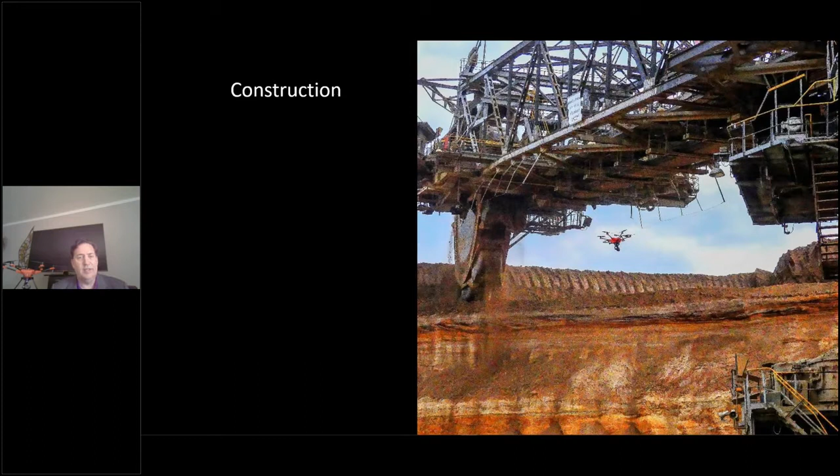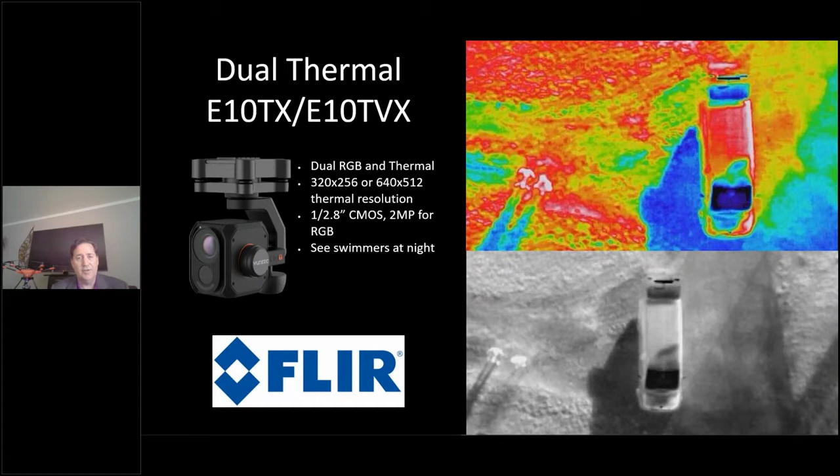No problem. So I'll quickly review the PhotoMesh UAV package that we have bundled with Yuneec and are offering specifically for the UAV market, and then we can go over the actual demonstration of the products from PhotoMesh and the Skyline TerraExplorer. So the basic features and capabilities that we focus on: extremely high accuracy and quality, optimized for creating sharp corners, sharp edges, really best use of the texture.

We produce all of the basic 3D mesh formats, including Skyline's 3DML. You could also produce a point cloud, an LAS format, or true ortho, and elevation layers. And we combine nadir, oblique, terrestrial images, all in a highly automated fashion. And you can also incorporate control points. You can work in any coordinate system, vertical datum, projection that is required by your customers.

The visualization side you could use for displaying different layers such as GIS on top of the 3D model, simulating movement, particle engines to simulate fog or smoke, as well as objects moving, and do any sort of measurement analytics in 3D. So that's really the full range of quality that we're working with.

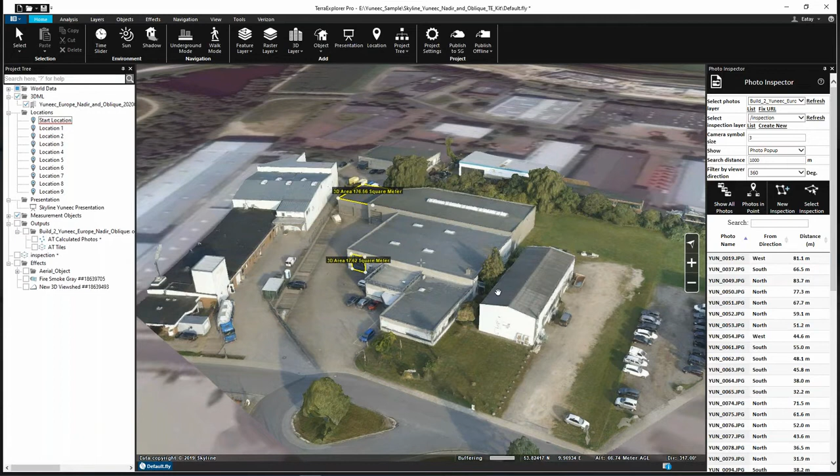To give you the quick demo, this is a sample from the H520 Yuneec drone. And this is the final output being displayed inside TerraExplorer. So the PhotoMesh UAV package includes the processing software, which is PhotoMesh, as well as the visualization and analytics suite, which is TerraExplorer. You could see the general quality, and I'll jump back a little bit and we can go over how this was made, the process for creating this data.

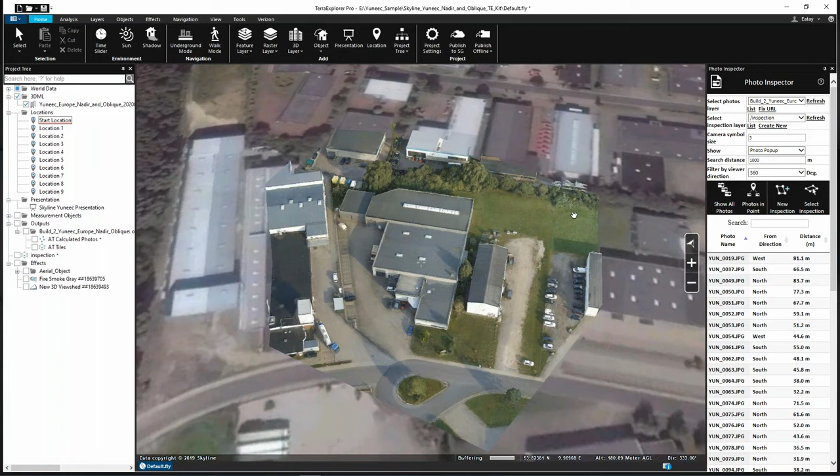And then we'll jump back in and show the full tool set and capabilities, features that are available in the full suite. So to cover the PhotoMesh side, this project is, in this case, nadir only. I have two projects to demonstrate. One of them is a nadir only project. The other one is a combination of nadir and oblique, to see how the software deals with both of these. This is courtesy of Universal Aerial Ventures, a Yuneec customer and user and flyer out of Oklahoma.

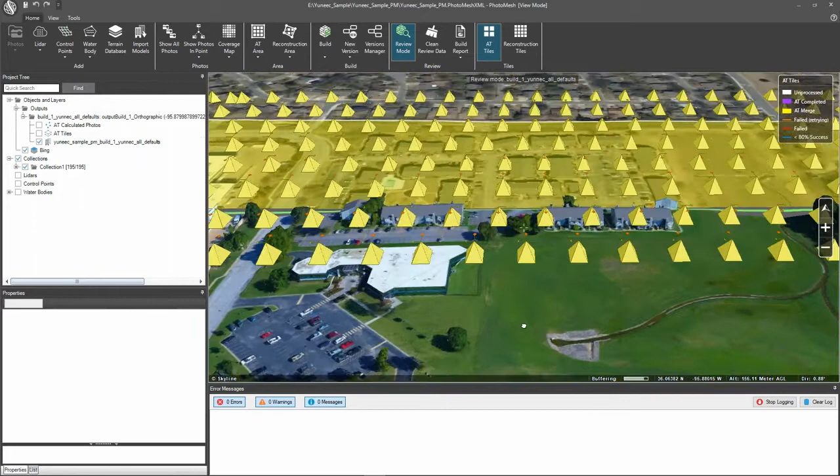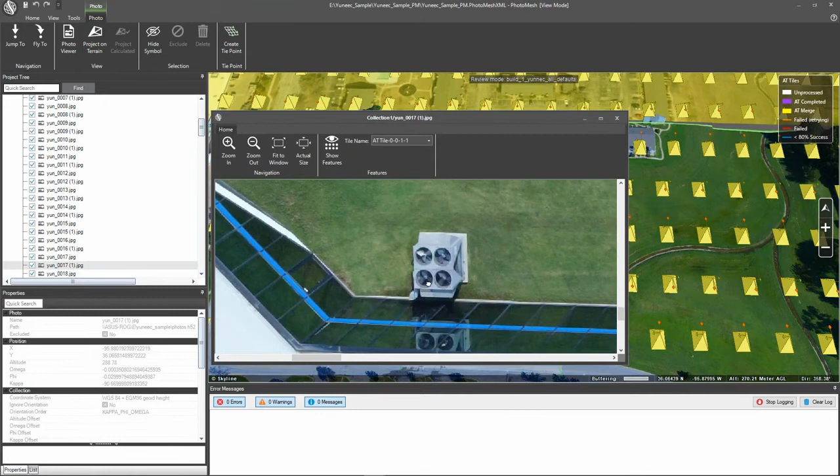So you can see this is the display of the images and how they were collected. This is a single image. And even though the images are nadir only, you could see on the side of the image, given the field of view and the lens opening, you could clearly see the sides, and you have very good parallax for doing depth measurement and creating the model.

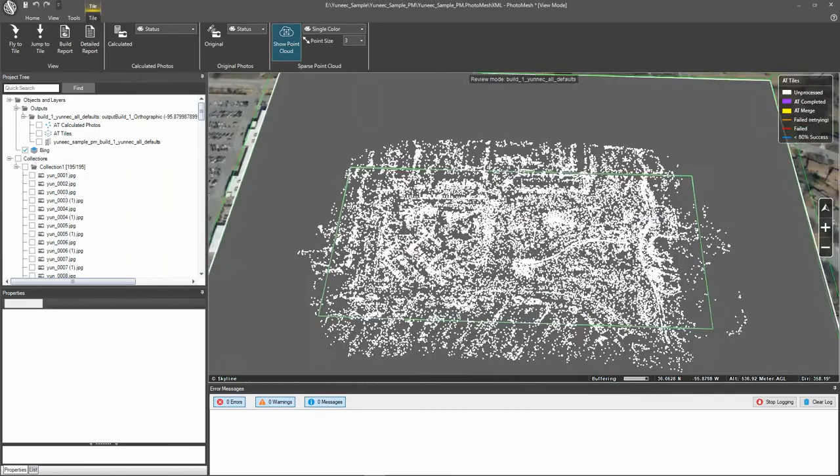So out of good overlap nadir data, we take the entire data set. We produce an aerial triangulation of the data set. And as part of it, we calibrate the sensor and the lens. So the principal point, all the radial distortions, we adjust the focal length, whatever is necessary to achieve a good quality correlation between all the images. And this is a sample of all the tie points that were extracted in this data set. So a very robust aerial triangulation engine.

At that point, we go through a full process of dense pixel extraction. See, this is a sample point cloud that was extracted from any combination of two or more images that were able to correlate data.

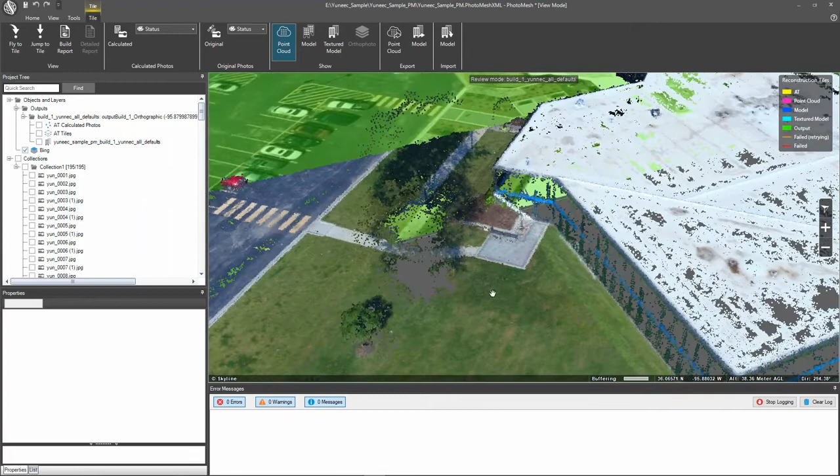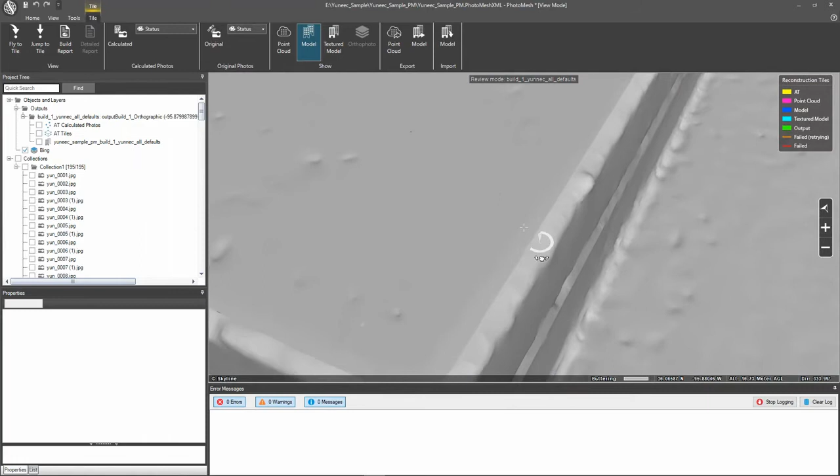And then we go through the process of creating a surface. So this is the surface. You can see one of the clear advantages that Skyline has is we do something called edge extraction. So we extract linear features, essentially break lines. So you can see over here, there's a very sharp edge to the building, and corners are also correlated with very high fidelity. That helps create a much more realistic view and less of sort of a melting effect.

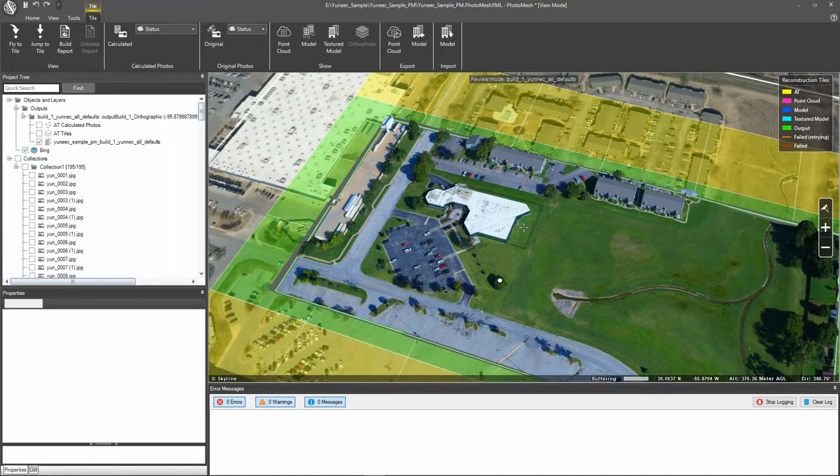This is one tile. So the project can be divided up into tiles, and there's also the option of utilizing multiple computers for parallel processing and scaling for large projects with the PhotoMesh UAV Pro. And then at the end of the process, everything gets combined into a single 3D model, which has built-in pyramids and levels of detail. So you can see it's very easy to move around and also stream over the internet.

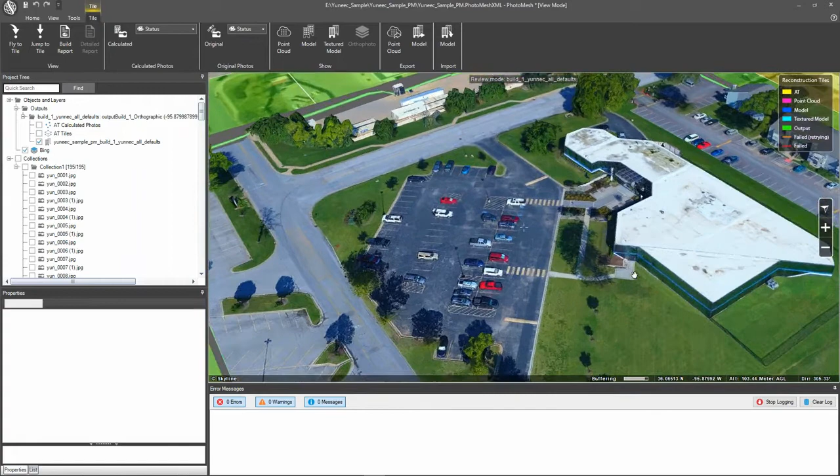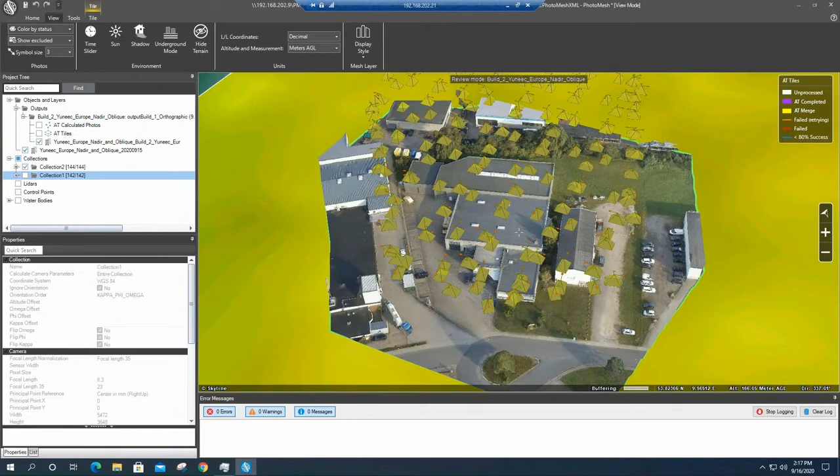So this is just an example of what you could do with a nadir-only data set with good overlap and good resolution, which is already a pretty good product. The other data set that we're going to review real quick and then jump into the Terra Explorer side, the visualization engine. This is a nadir and oblique project. So you can see these are the nadir images that were collected.

And then these are the oblique images that were flown in both north-south and east-west direction, each time pointing at a different angle. So you see this is pointing towards the south, this other strip pointing toward the north, and then the same thing with the east and then the west.

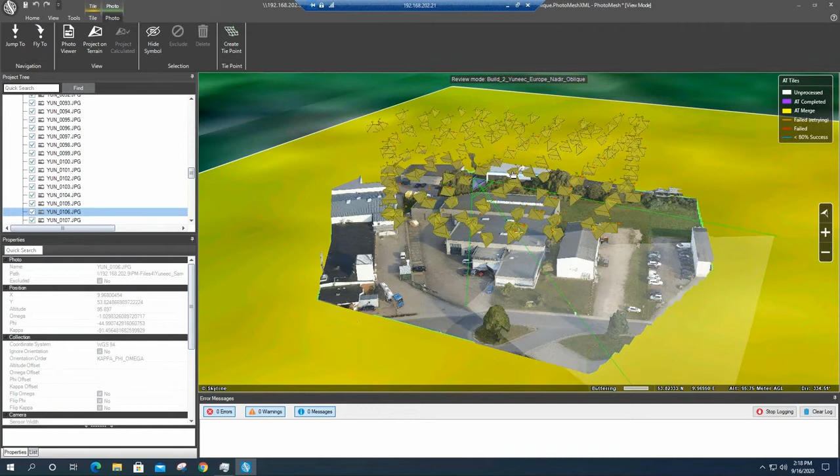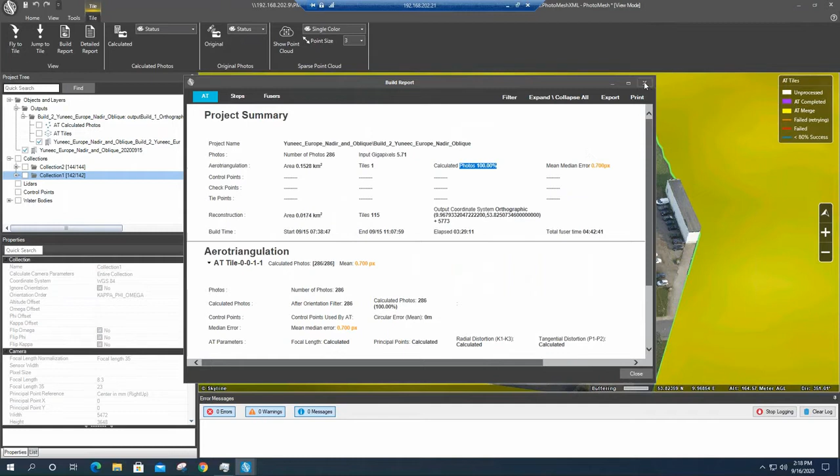So we're also able to automatically calculate all of these images. And we calculate 100% of them with good residual, and we can calibrate as many cameras as necessary in the process, and we can treat them as different cameras to achieve the best quality in the geometric output, the bundle adjustment. So you can see the difference once you have the obliques is you clearly have a better mapping of facades and sides of objects such as walls.

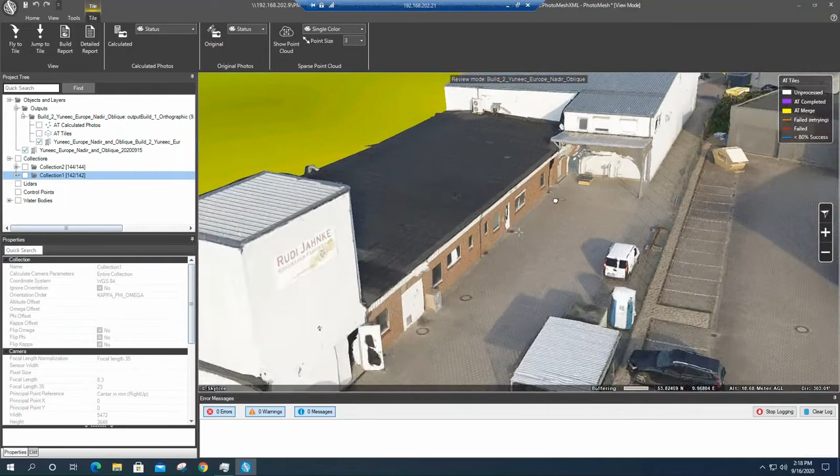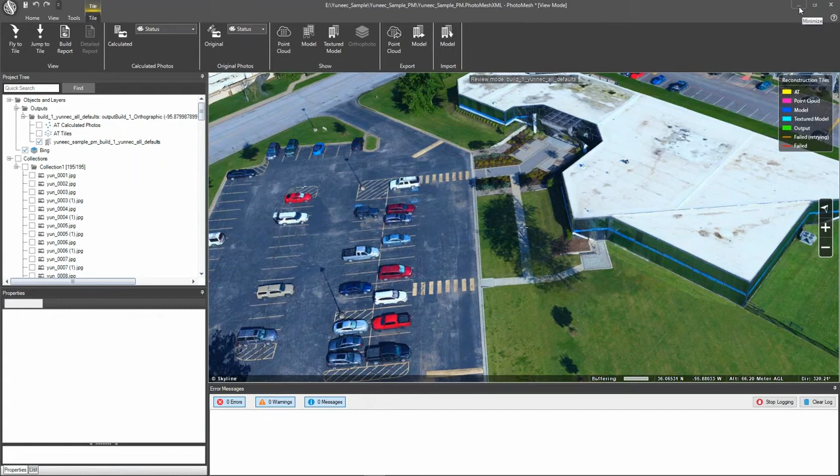The edge extraction still takes place to produce a very clean edge line. It also allows you to get underneath features using the oblique imagery. So things like getting data underneath trees as well as capturing poles from the side to have better representation of thin features. So these are the examples of PhotoMesh with different Yuneec projects being processed through.

Now on the TerraExplorer side, once the data is brought in, everything that we do is in a real world location. So you can see, zoom out, this is in North Germany, near the border with Denmark. And we can incorporate additional ortho layers or stream in WMS layers. So you could take advantage of Mapbox or Bing or really any other background layer, as well as Skyline has its own base globe imagery and terrain.

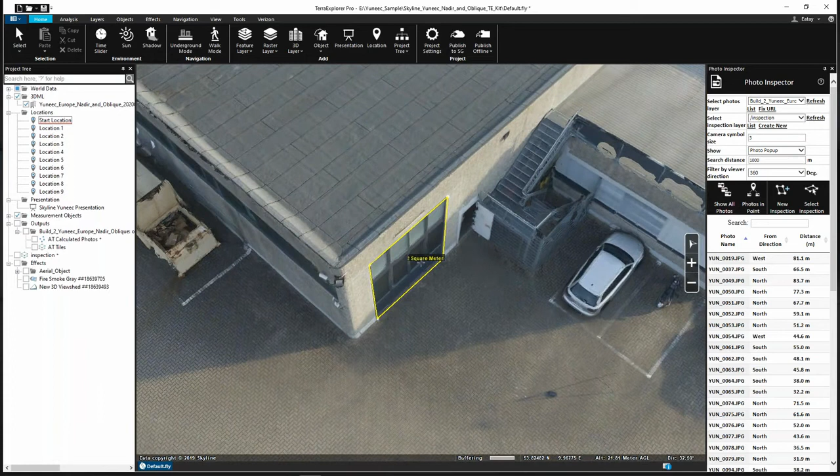Now everything is displayed on a global scale, and it's also in 2.5D. So you get representation of terrain and any sort of elevation relief. So to give you some insight into the capabilities for measurements and analytics, any sort of 3D measurement is possible, whether it's on a slope or a 3D plane, a 3D area, general vertical measurements, horizontal measurements. This is a measurement of the garage door.

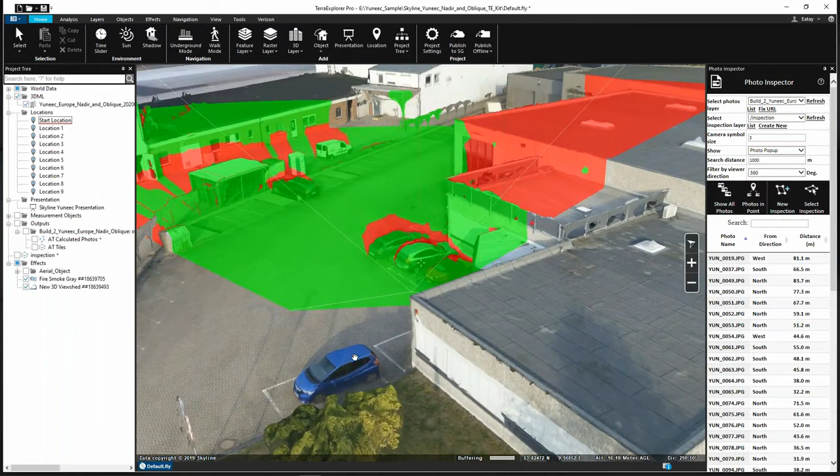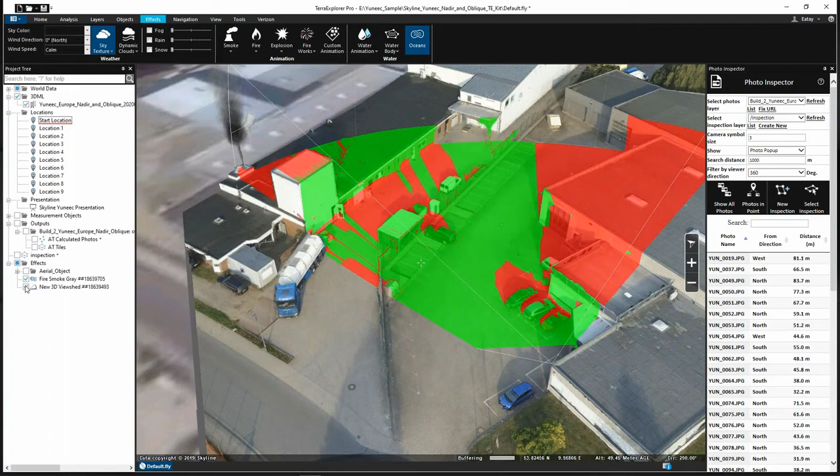As well as 3D analytics. So you can see over here, I'm simulating a flight, and this is what the camera would be able to view from the flight. So a moving 3D viewshed, as well as a static viewshed, which could then be used to analyze a camera view and obstructions from different angles in order to understand how to position certain things. And then I could also simulate smoke, wind, water, any sort of effect using our very advanced particle engine. So these are some of the capabilities that are available.

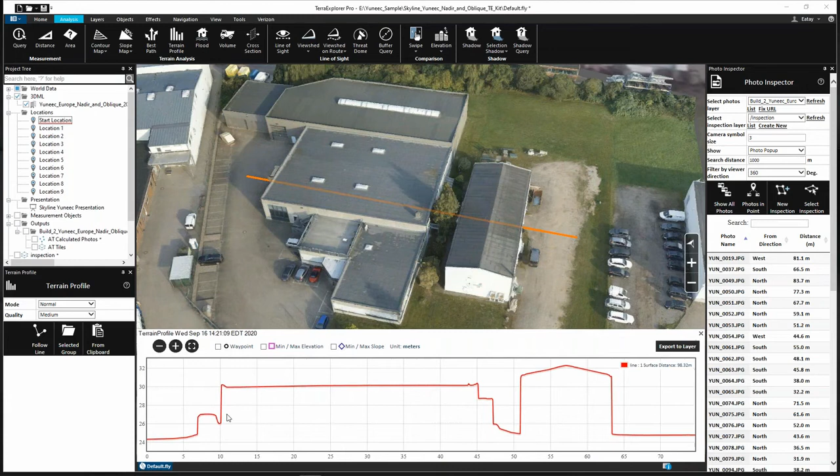The other ones which are built into the tool on the fly, you could do a terrain profile. So if I wanted to, let's say, view a side view of this line, I can calculate the profile and then have a view of everything that is within that line. And also I can measure slope on it, measure distances, as well as display a dynamic slope map on the fly. So I can see also the directionality of the slope as well as the angle of it.

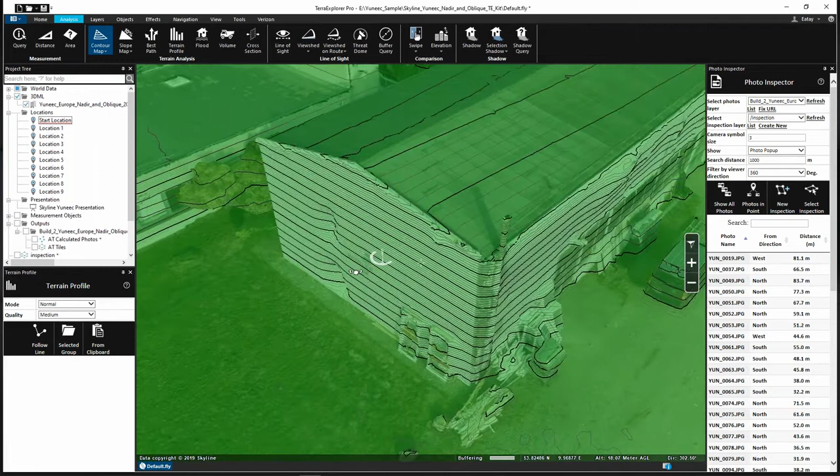And also a contour map, which is also dynamic. So as I zoom in, it brings in more contour lines. So you can really get a sense of the depth. And of course, you can just measure it, besides the visual aspect of it. So let's say if I wanted to measure the distance from here to here, you can see I have a 3D measurement of both the vertical difference and the horizontal distance and the aerial distance, as well as the slope. So this is all possible within the tool.

The last specific feature that I'm going to review is the photo inspector. So the photo inspector allows you to view the raw images, the original images that were used to produce the data, and this could be utilized in order to do inspection or get access to the native resolution of the pixels.

So let's say if I wanted to view this sign in one of the images, I can click on it, and then it gives me the option for which images to view it. I can decide to, let's say, view it from a certain distance or what I think is the closest image, and there's the image. And that's the location I clicked with the image on it.

And you can also see the smoke that is coming out of these chimneys that actually wound up being modeled a little bit. So this gives you an idea of what the original image looks like.

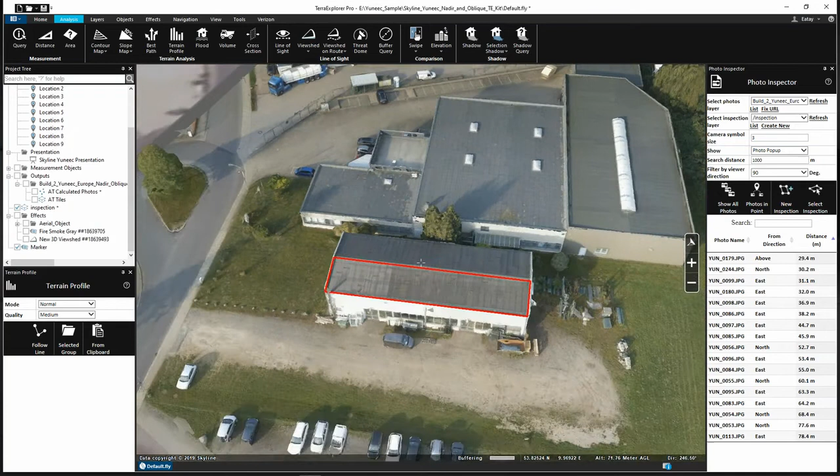You could also create inspection layers, and those inspection layers can contain additional attributes that you could fill in as you mark them. So let's say if I wanted to mark an area that I consider to have an issue, I can mark it, and then I can also create a new inspection layer on an area that I think is something that needs to be reviewed or that I found something in for analysis.

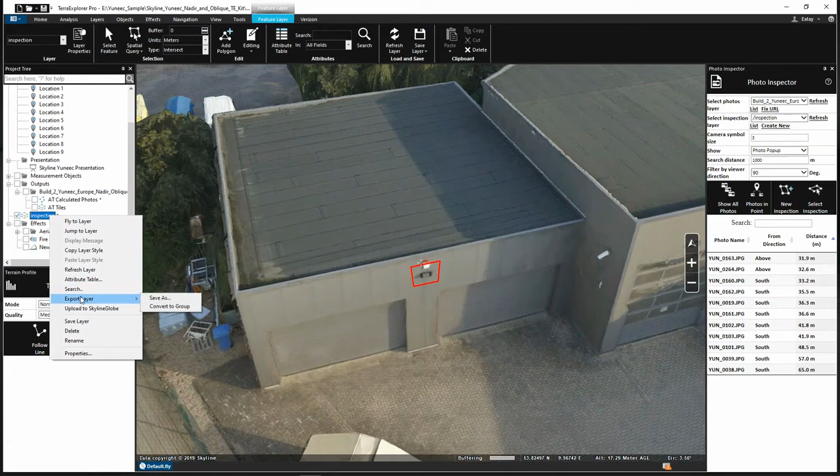So I can just do a quick square over here, and then I could feed in your name, let's call it Rust, and description, and say requires ground inspection, and that becomes a layer that you can then export really into any common format: SQLite, shapefile, geodatabase, or 3D geospatial PDF. So those are some of the ways that you could utilize and accumulate inspection layers inside the tool.

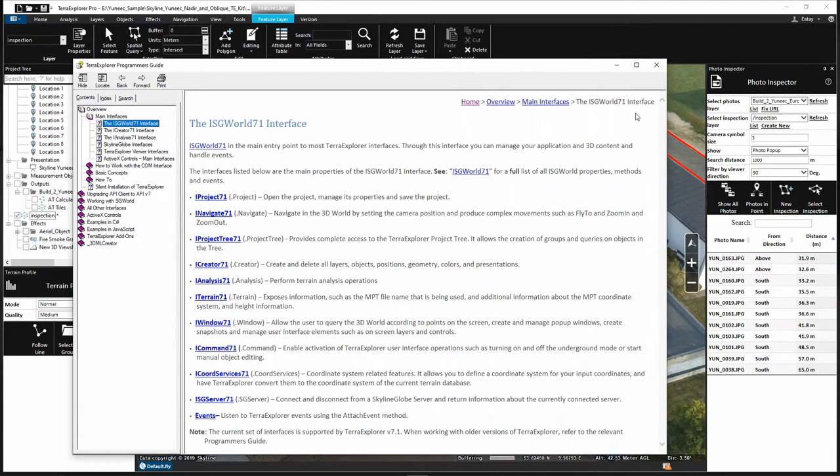So any questions so far, we'll be able to address them. There's one about software providing automated flight capabilities. Yeah, so the software is not really used for flight planning built in. We do have a very robust API. So Skyline TerraExplorer allows you to utilize the 3D engine and all of the tools that are available in order to create your own workflow and your own applications. We have certain customers that utilize it in order to do flight analysis or automated flight analysis.

We're more of a technology firm. As you can see, we focus on developing the 3D technology, optimizing the 3D streaming, and all of the 3D tools that are available on top of the layers. And we work a lot with other businesses, like Yuneec in this case, drone manufacturers, but also industry-specific ones, like in mining and construction, who then utilize our API.

The question on the photo inspector: it is an add-in that we can produce as TEZs that get installed inside the software. So that's something that is possible to have as an add-on in TerraExplorer. We look in the future to maybe have it built into the tool to some capacity, and then it'll also be available through the API for people to customize and add additional features to.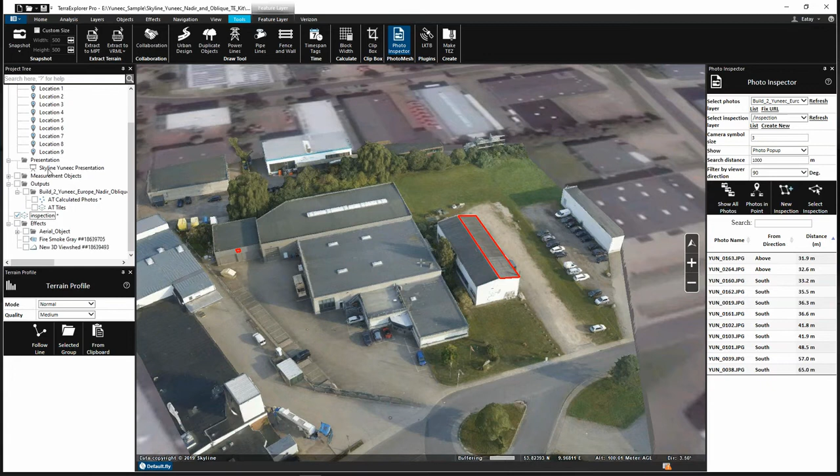So if there's no further questions, I think we're getting close to the end of the half-hour slot. One more thing that I would like to highlight is we can create an automated presentation. So once you bring the project in, sort of like a macro, you could record certain steps, fly to different locations. And then when you distribute the project to somebody else, all they have to do is double click the presentation, and then you see it goes to different locations.

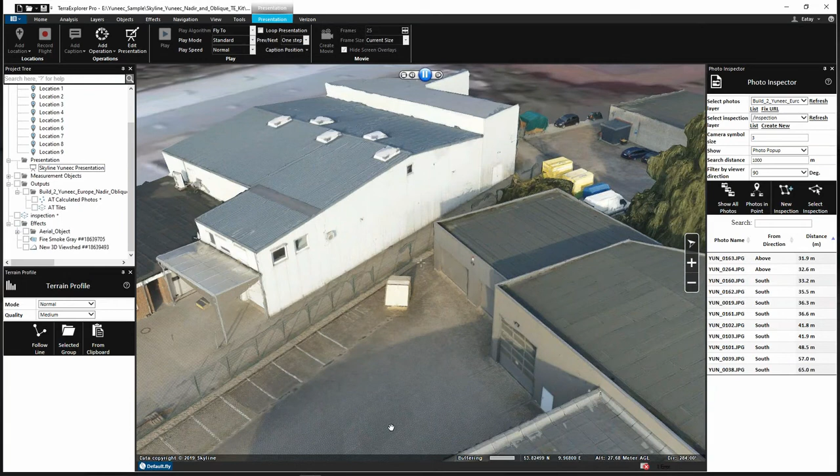You can add captions. You can turn layers on and off automatically, measurement objects. So you essentially create a scene or a fly-through that at any point could be paused. You could view it, you could turn it around, you could show something, and then you can go back to the presentation and continue playing it.

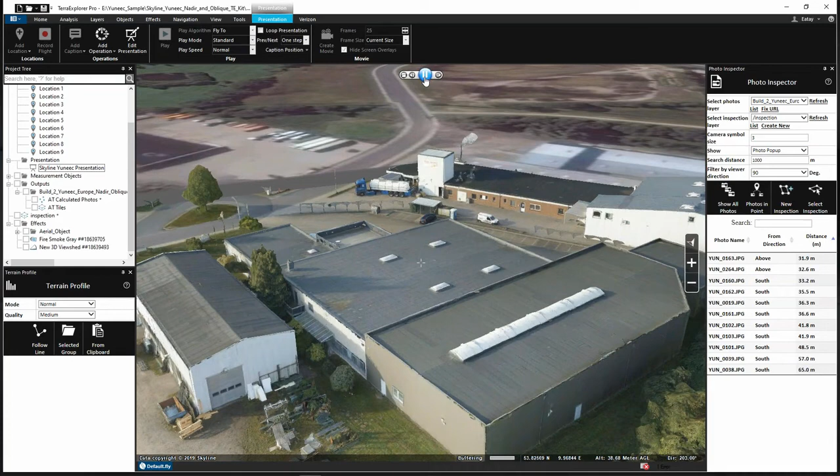Excellent. Thank you so much, guys. That was fascinating. If there are no other questions, I will remind everyone that you will, oh, I see one more question. Eatay, they're asking about software in real time. Yes, minimum computer hardware to run the software.

The minimum is probably 16 gigabytes of RAM, an i7 or an i9. We do not require a very high powered GPU. We can work with the onboard video card. In terms of running the software in real time, I don't think using the drone computer would be enough, but you could definitely, as soon as the images come down, because we have the ability to scale up and run on several machines at once.

In our internal production, we have almost 100 computers running. So you can set up in the field a 5-computer setup, and they don't have to be powerful computers. They could be mini PCs that are the size of basically a VHS tape. And then you can set up a 5-computer configuration that can process through the data very quickly.

Let's say a project of about this size, that's about 200 images, would process on a single computer within 7 or 8 hours, but if you run it on 5 computers, it could finish in an hour or an hour and a half. So you can have the results pretty soon after you land.